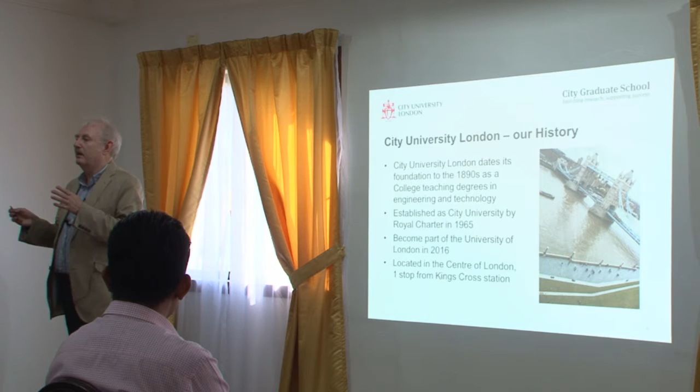If you think about developments in the 20th century, so many were driven by looking at new physics and then taking that forward into creating solutions which have profoundly influenced the way of life we have now. It's almost impossible to envisage the world we live in without it having been shaped by fundamental discoveries in physics, particularly in the 20th century, but some going back to the 19th.

With that, of course, come some great entrepreneurial opportunities. We've seen, particularly in the development of IT, people who have made vast sums of money exploiting those opportunities, and we're very familiar with some of the names of people who have done that.

But if you look back at some of the great scientists of the late 19th and early 20th century, someone like Lord Kelvin, so familiar to us from the Kelvin scale, was really a very entrepreneurial physicist. He worked in the field of communications, on the early transatlantic cables, solving many of the problems that led to the first transmission of the telegraph and then the telephone across the Atlantic using effective cables. In doing so, by being involved from the start, he made himself a lot of money. So being an entrepreneur is not new — it actually goes back quite some time.

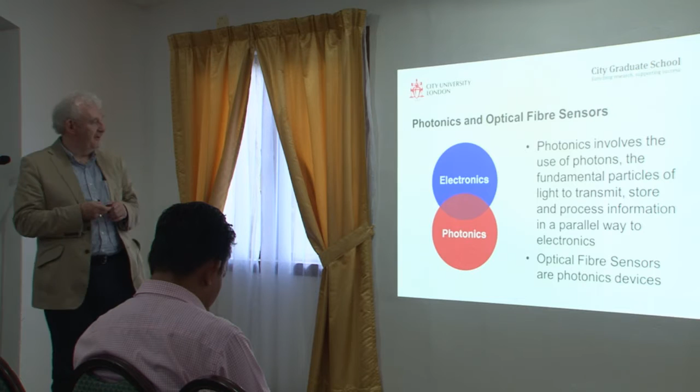So if you think about it, the electron is a fundamental unit of charge, of course. It's got a small mass, and it travels along a cable in the way in which we're familiar with. You can look at the parallels between the electron and the photon: it's a fundamental unit of light, but there's no mass, and of course it travels along insulators in the same way that electrons travel along conductors.

And of course we're transmitting information at the speed of light in that medium, and the medium is typically glass with a refractive index of around 1.5. So you can see you get a reduction in the speed of light in vacuum by that factor. But it does mean that you can transmit information very fast, and of course we're familiar with that with optical fibers used in communication systems, because that's the way in which we get the quality of communication that we have at the moment.

So optical fiber is very important. I'll be dealing with sensors using conventional optical fiber. In many ways, the same type of optical fiber is used in communication systems, or fiber that's relatively similar. I'll show some of the differences perhaps as I go along.

And Gilberto will mention a different type of fiber in the presentation that he gives. In that way, you can see the parallels between the use of communications type fiber for optical fiber sensors and some of the new microfibers and the potential that they have. So what it shows, I think, is that optical fibers in sensing — it's not just a straightforward single sphere of work, but in fact one where there is considerable breadth.

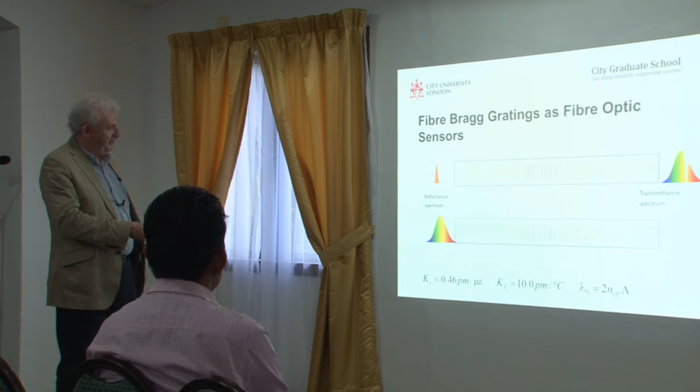If you then take that same grating in the fiber and change its characteristic - for example, you stretch it as a result of temperature, pressure, strain, or humidity - that stretching changes the wavelength that you get coming back. In that way you can pick up a slightly different signal, and relate that perturbation, that change, to the change in color.

Just going to grab one of these things here, which will give me some... it does a trick. There is a straw. Great, and then perfect. Good, that helps.

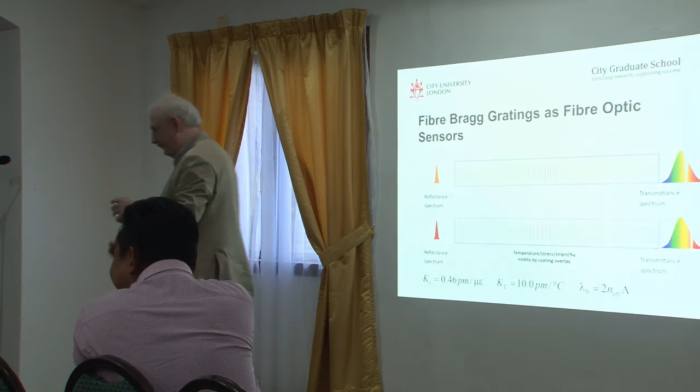So we have the characteristics of the optical fiber grating.

We've done a number of different things along the way, and I won't dwell on all of them as there simply isn't time. But one thing particularly relevant to the issue of coastal erosion and protection of landscapes is some of the work we've done on safety monitoring in relation to steel and composite bridges and concrete foundations, because we've put optical fiber sensors into some of these different types of structures, and I think there are many parallels to the solution of the type of problems we have here. This is a rather nice bridge.

It's a 350-meter concrete bridge in Norway, and we put some optical fiber sensors in the middle of this to monitor the strains due to the traffic.

So the sensors were installed within the bridge after it was built, and we were able to monitor quite nicely. This is a much smaller bridge, a 10-meter bridge. It's not designed for traffic at all, but in fact for people. Although on the opening it was, you can see that it had a rather heavy piece of traffic through this.

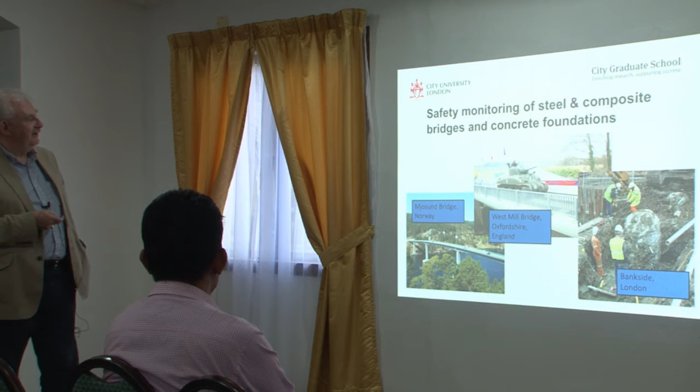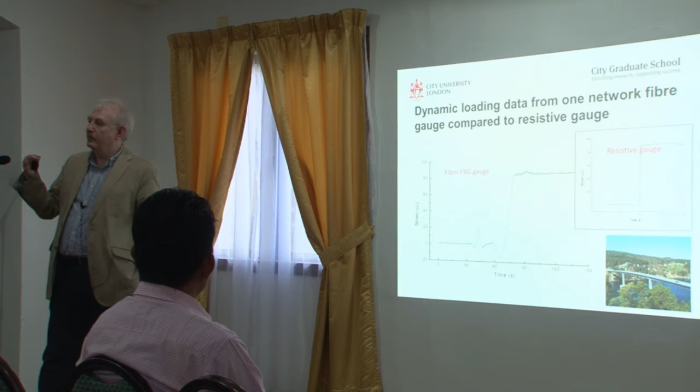So you can get results which parallel very well the results you get from the resistive gauge. You can get more information, and of course this is just from one gauge, and you can put many of these gauges, connect them in a network across a bridge of several hundred meters. So I think this is one parallel with the situation we have here, where you want to make measurements over, I'm sure, many hundreds of meters. So optical fiber sensors joined together in a network work very well under those circumstances.

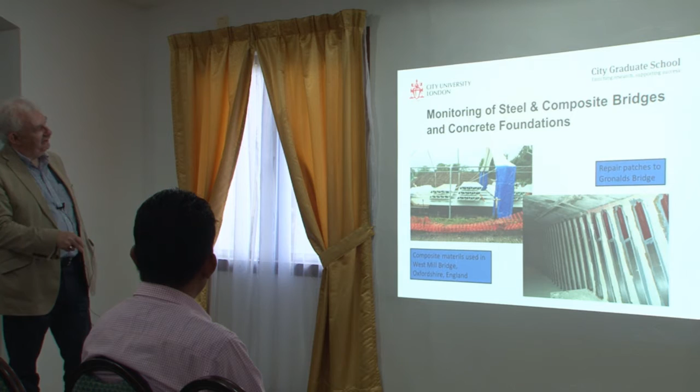This is the inside of a bridge. It's a box section, well, rather similar to a room like this. And if you imagine if there were cracks in this wall, then basically this is the problem that you have with this concrete platform bridge, that it has cracks because after 30 or 40 years, then you begin to get problems with the degradation of the bridge due to cracking.

So what you can do is you can put patches on it, and these patches are made from carbon fiber, and in some of these you can put optical fibers, and those optical fibers will help you to measure the strains on the repaired bridge, and help you to avoid excessively straining the bridge, so that you don't end up with more problems from cracking that's continuing.

This is another bridge we looked at, one which we had access to. It's a 1950s railway bridge in Sweden, a concrete bridge that was taken out of service. You can see that this bridge has been loaded, and you can see the major cracks that have resulted from the loading.

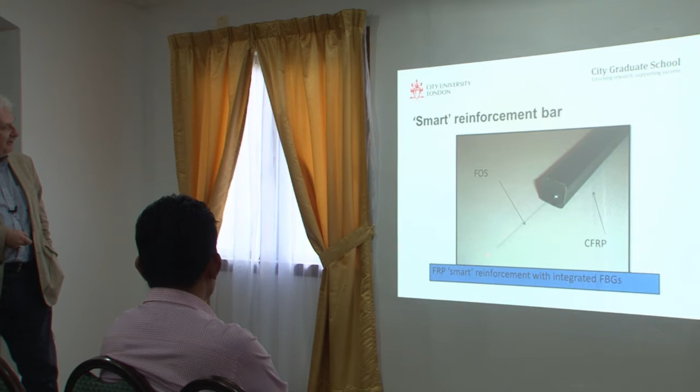Before this bridge was loaded, we put some optical fiber sensors into it to monitor what was happening. This is the technique we used: we took carbon fiber reinforcement bars, put an optical fiber inside those bars, and then inserted them within the bridge. This is the carbon fiber reinforcement - you cut a groove in it, glue the optical fiber sensor in, drill a hole in the concrete, and then insert the tube into the structure.

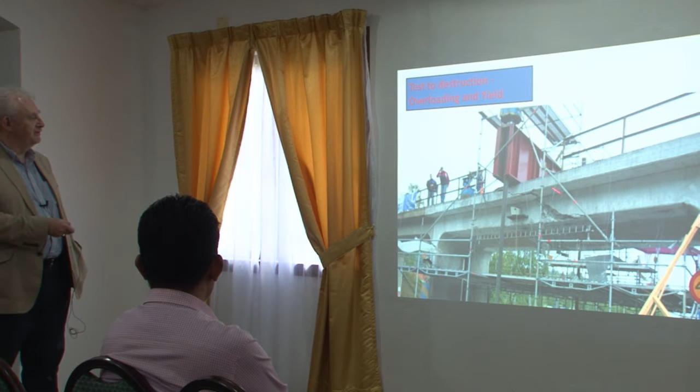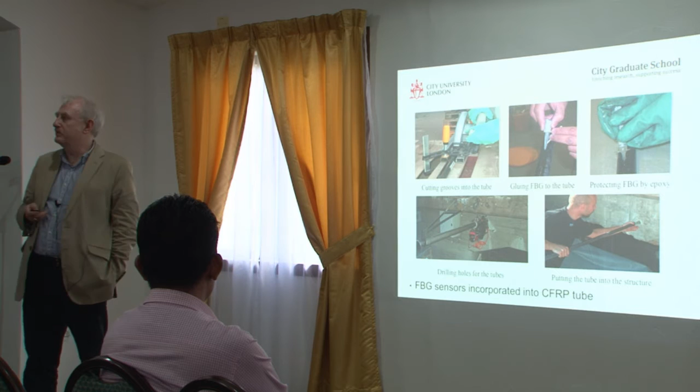And then the optical fiber within that reinforcement bar is used to provide strengthening. In our case, we were actually loading this to destruction because it was an unusual situation. The load was 10 meganewtons, and we were very easily able to measure that load and the strains that were created. You can use these techniques in the repair of bridges, and that way maintain them over many years.

One thing you might think about with optical fiber sensors is that optical fibers are very delicate. If you're doing work in a laboratory with optical fiber, you're dealing with something delicate, something where you want to keep it in a nice, clean, dust-free environment. But in fact, one of the things you can do with optical fiber sensors is install them in concrete.

This is some work we did with a commercial firm that makes precast concrete pieces. Think about concrete lampposts, concrete railway sleepers - there are a lot of standard precast systems available where you make certain pieces by the hundred or the thousand. There are commercial companies like Creagh Concrete which do this.

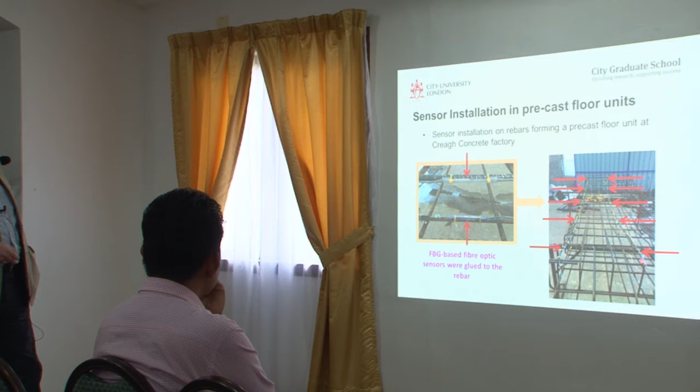For some of these, you want to measure what's actually happening within the concrete. This is a floor panel, fairly large. What we've done is build a cage of reinforcements using steel, and then put an optical fiber with optical fiber sensors using Bragg gratings to measure the strains. You can see the yellow optical fiber running all along the reinforcements, and then this cage is filled with concrete.

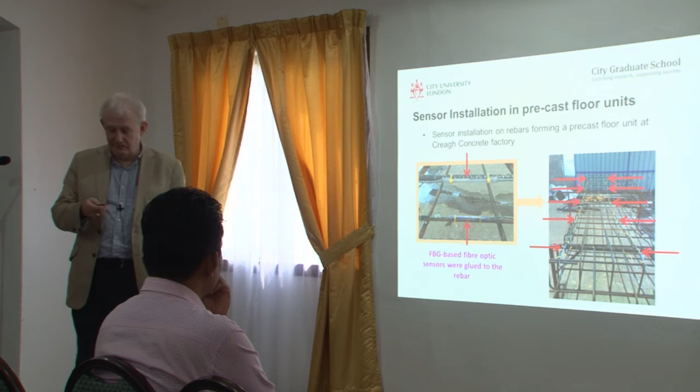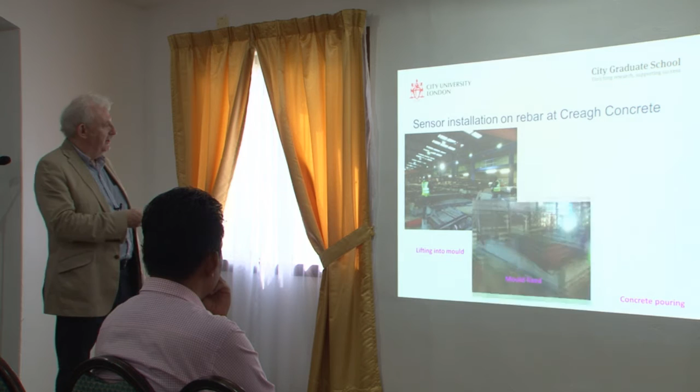This is the factory. You can see the workers involved here, and this is the production line. This is one of these large devices being built, and then we're pouring concrete onto this cage - nasty wet concrete being poured onto the cage to make the panel.

If you look closely, you can see the panel, and coming out of it is the optical fiber itself - the yellow is the plastic coating on the optical fiber. We have a couple of connections here just being held up while the concrete is drying. This is the sensor connection, inside the concrete here, and we're just protecting it with a simple plastic bag.

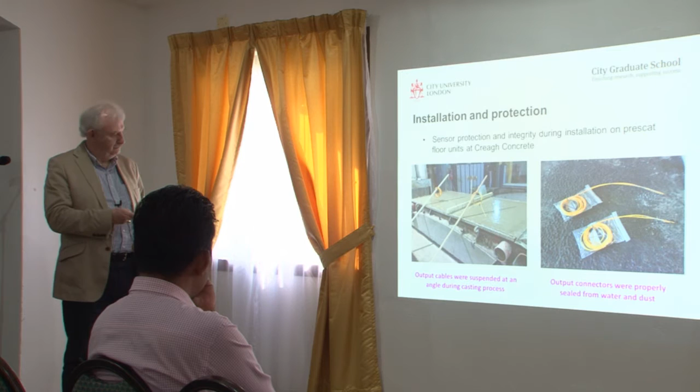So you can use these optical fiber sensors in concrete to make measurements. This is one of the important things that links into our problem of landslides and erosion - I'm sure there are going to be situations where we want to do the same.

Another problem with concrete is the energy it uses. If you manufacture concrete, as major countries across the world do, there's a vast amount of energy used in its manufacture - it is very, very energy consuming. One way of trying to reduce that is to cure the concrete under situations where you use different types of setting rather than just conventional heat. We're working with colleagues at University College London and a couple of commercial companies to microwave concrete. Like using microwaves to heat food, you can use microwaves to heat concrete and make it set faster.

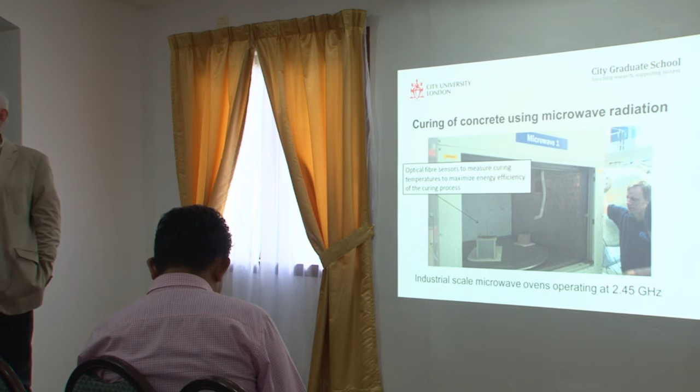The main difference is that you need a rather larger oven. This is a commercial microwave oven. You can see from the comparison with the worker here just how big it is, so you can cook a lot of food in that. Our colleagues in the company have demonstrated that you can cook something like a large turkey that won't fit into a conventional microwave oven - it fits beautifully into this, and I'm told it's very good.

So we're cooking concrete, and for the purposes of this test, we're using standard cubes of concrete. An oven like this, and indeed a bigger oven, is really planned for the curing of devices such as concrete sleepers for railway systems. They're that sort of size, and they fit very well into an oven of that nature.

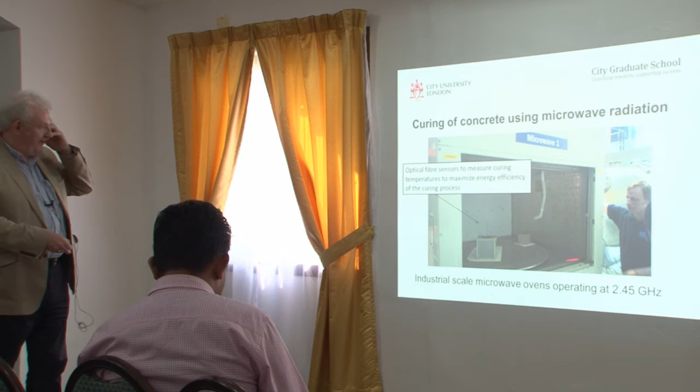So what are we doing? This is our colleague who runs industrial microwave systems, Bob McKinnon, and we're looking at monitoring of the signals from the fiber Bragg grating that we put into this concrete while it's being cured. That's the standard block, and this is our optical fiber sensor. It's a little hard to see, but there's an optical fiber sensor just coming out here.

The approach is this one here. In this case we've got simply 5 fiber Bragg grating sensors in the center of this cube, and you can see it coming out here. These are standard blocks that civil engineers use for testing.

This mold here is made out of plastic, because if you think about the fact that within a conventional microwave oven in the kitchen, you don't put metal objects into it. So again with this, you don't use a metal case, but a plastic one - you can use plastic or ceramic. In our case, we use plastic to produce these standard blocks.

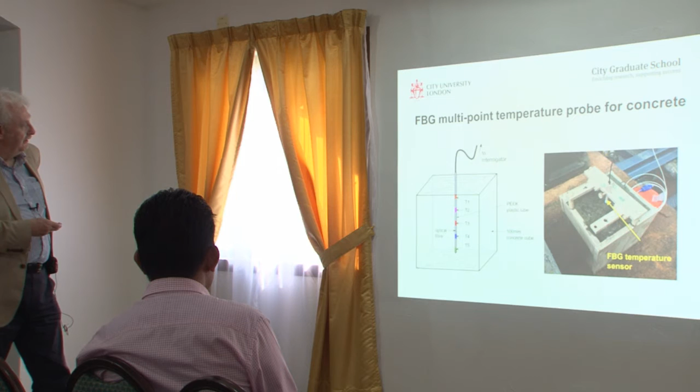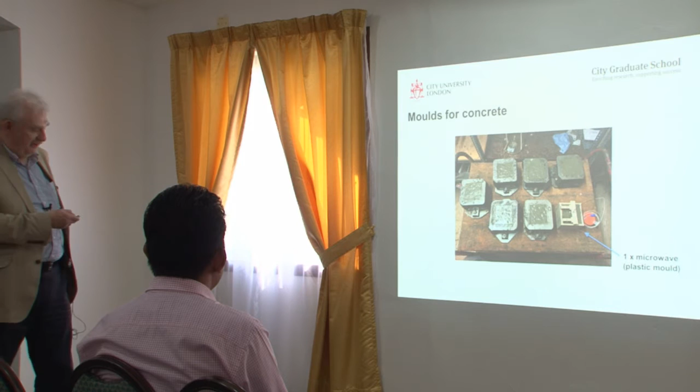And that's our fiber Bragg grating temperature sensor, just here. So these are the sorts of molds that we're comparing with - this is the plastic mold that we use for the microwave.

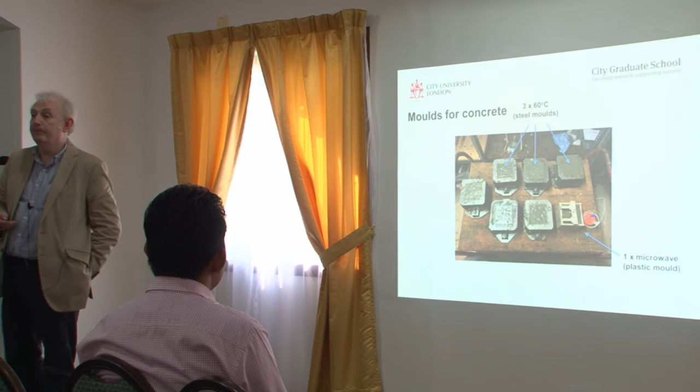These are 3 steel molds, and what we do is we cure them at 60 degrees using steam - this is the conventional industrial way. Then these 3 were cured at room temperature, again in the steel mold. So we were able to compare steam curing with room temperature curing with microwave curing.

The interesting thing about the microwave curing is this: you can monitor the temperature, and these are the outputs from the 5 sensors. You typically want a temperature between about 60 and 70 degrees in the concrete. If you go too high, you'll start to boil the concrete, and you'll get the same problem as if you put an egg in its shell into a microwave oven and heat it - it will explode. You'll get this sort of internal explosion of the concrete, which destroys its quality. So you want to keep it at about 60 to 70 degrees.

The black line is the power profile, showing the way you can put power into the system. Just like your domestic microwave oven, where you can turn it on for a second or 10 seconds and then turn it off, with the microwave power what we end up doing is having a burst of power, then turning it off, then another burst - with the feedback from the control system, you can see that mostly the microwave oven is off. We're maintaining the high temperature by minimizing the amount of energy we're putting into the concrete from the microwave oven, so it's very energy efficient because the oven is off most of the time.

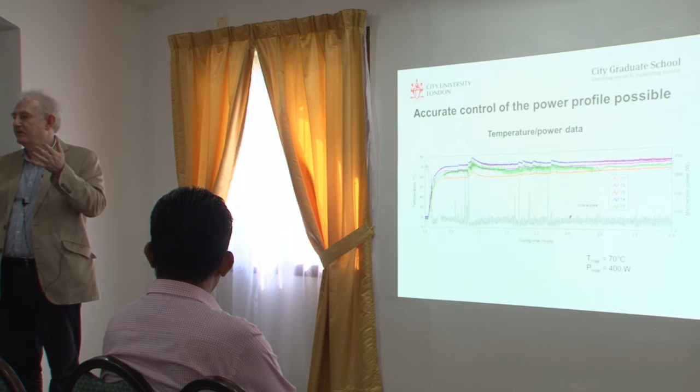If you compare that with the way you might do it with steam curing, you're passing steam continuously over the concrete sample, generating steam at above 70 degrees and passing that over - so you have a lot of energy needed to generate that steam.

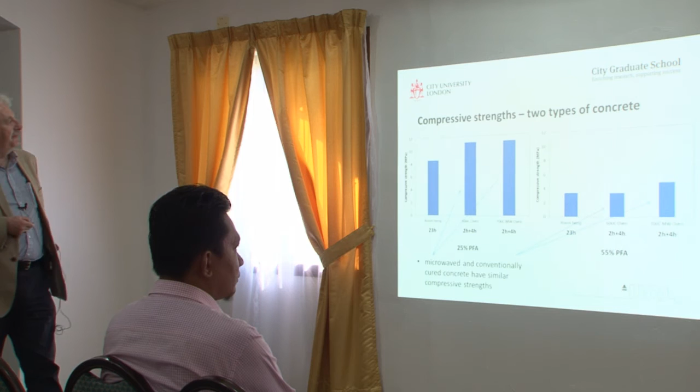And these are some measurements of the compressive strength. We had a meeting just last week of our consortium, and there is some new information that's come through from the tests that are being done. But there are two tricks that we've used here that supplement the use of microwaves to produce very low energy consuming concrete.

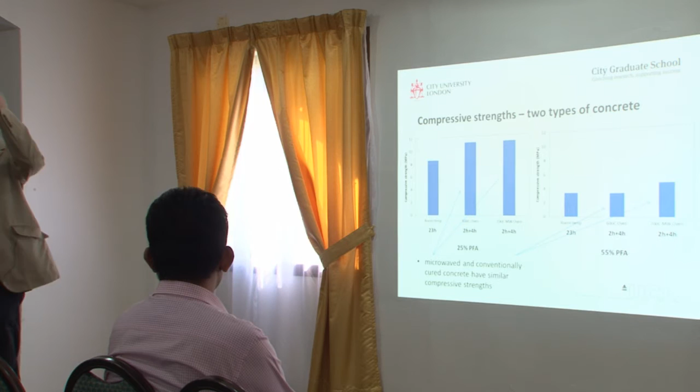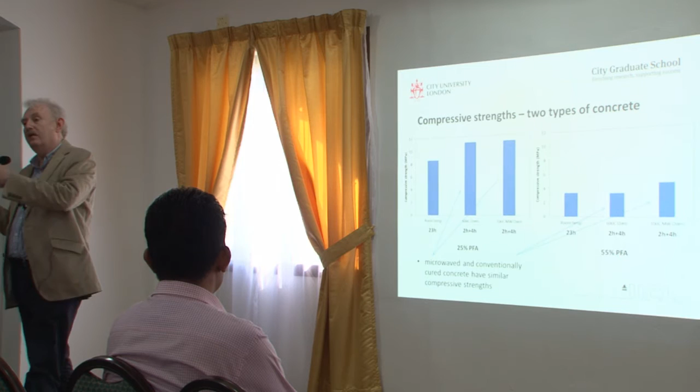This concrete contains 25% pulverized fly ash, and this 55% pulverized fly ash. Fly ash is a waste product from coal-fired power stations. It's a waste product, and there's a real problem getting rid of it. But it's a very good material to put into concrete because it reduces the amount of cement you have to use. So if you've got 55% pulverized fly ash, you only have 45% cement. Cement is expensive when you're building very large buildings, so you're reducing cost. In addition, you're reducing energy. The pulverized fly ash is a waste material, whereas cement is a material you have to manufacture, using energy to manufacture. So this is the one we're particularly focusing on.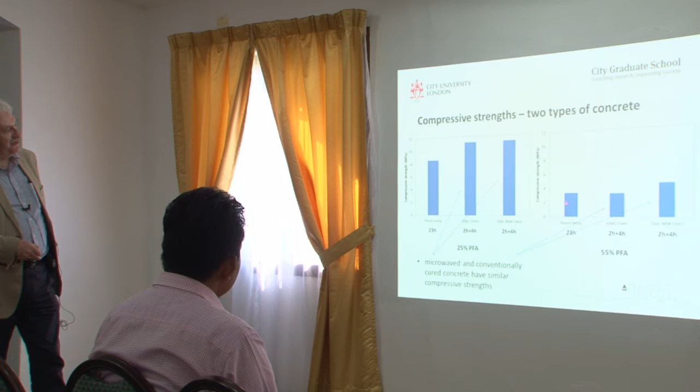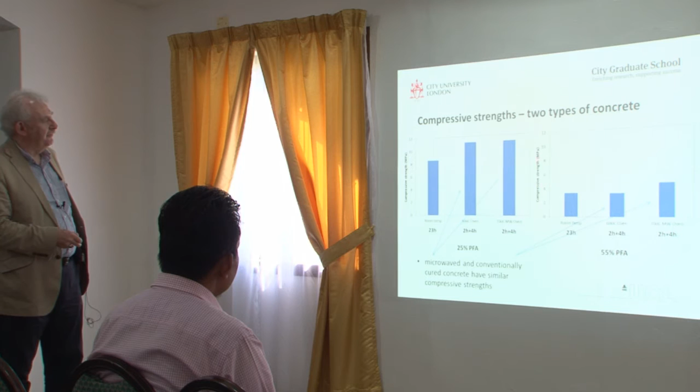And you can see here that looking at the compressive strength with room temperature curing, oven curing, and microwave curing, you're getting very similar levels of strength. And in fact, that's showing a strength of around 4 megapascals.

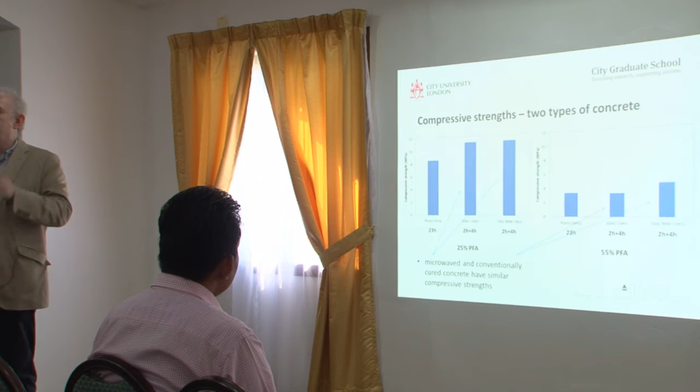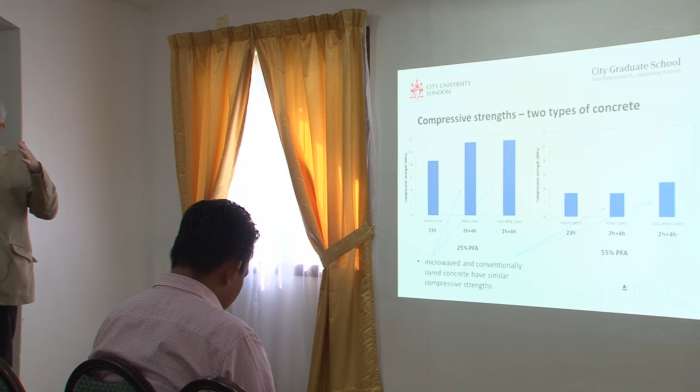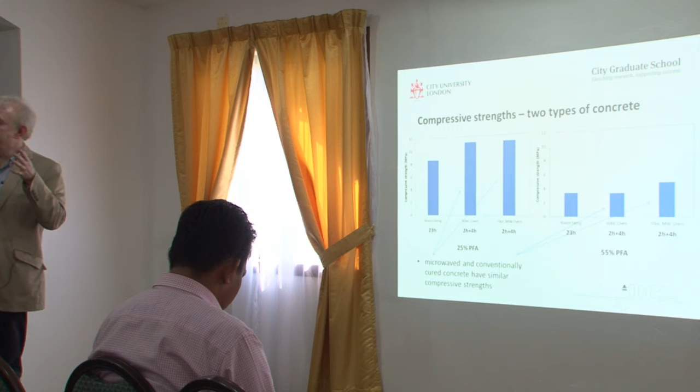At our meeting last week, our colleagues were using a new formulation of cement, and they were able to get strength up to 15 megapascals. That's very, very important because our industrial partners were then able to say the strength of that concrete is the right strength we need for the production of the types of precast elements we produce. So they're able to get concrete of the right strength, which used a lot less material, and also used microwaves to cure it. So the whole energy efficiency of these new samples was very, very much better.

And this is just a picture of the energy efficiency of the samples here, comparing conventional with microwave for the two different types of fly ash. So it's a very efficient way of making concrete.

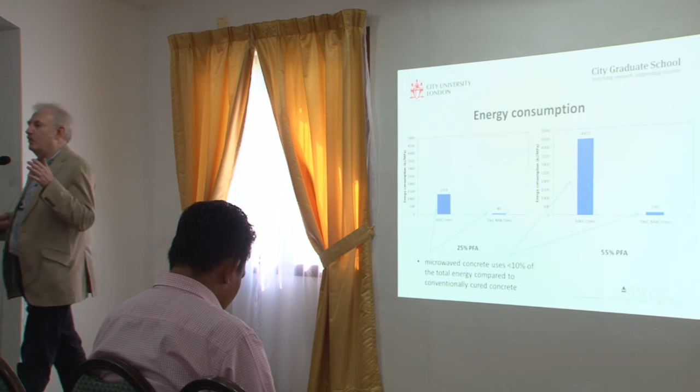So what you have here is high quality using the optical fiber sensors in a way that you can't do with conventional sensors, and at the same time obtaining a very, very low energy profile. And that's the power profile that goes with it. Again, you can see mostly off, with just peaks of energy coming in.

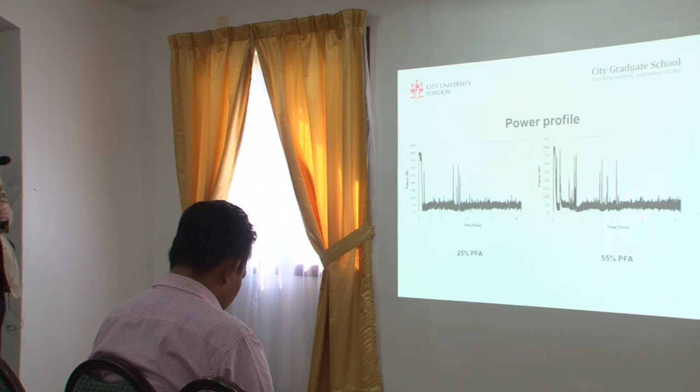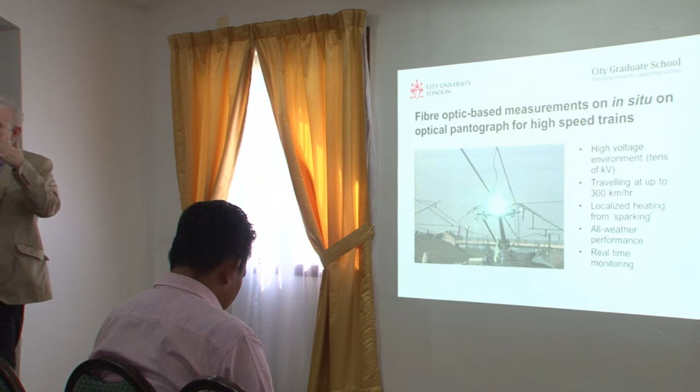Another problem we've been dealing with is the measurement of the conditions of train pantographs. A pantograph is the part of a train that connects to the overhead electrical wire, running at typically 25 kilovolts and high current, 100 amps or something like that. So there's an enormous amount of power coming through this into the train to drive it. One of the problems is maintaining the contact, and what happens when you have a difficulty with that. Now I've got a little video here, and I'm wondering if I can make it work.

It might take me to just hit this here. Good. So this is a pantograph on a conventional track line here. Everything's working fine, and this is the way it should be.

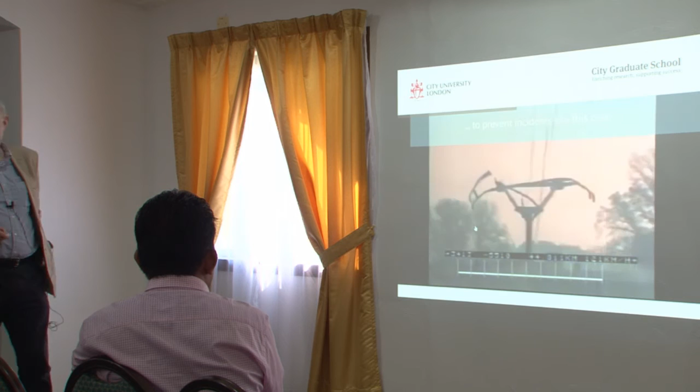So we've put our optical fiber sensors onto this pantograph. This is where things start to go wrong. You can see some of the difficulties that arise - if you break up the pantograph, you can have problems with it breaking, the connection failing, and it can sometimes take the line out. So what we're looking at is putting optical fiber sensors onto the pantograph. We're working with this group of companies here - these are the main manufacturers, and Network Rail are the people who use these.

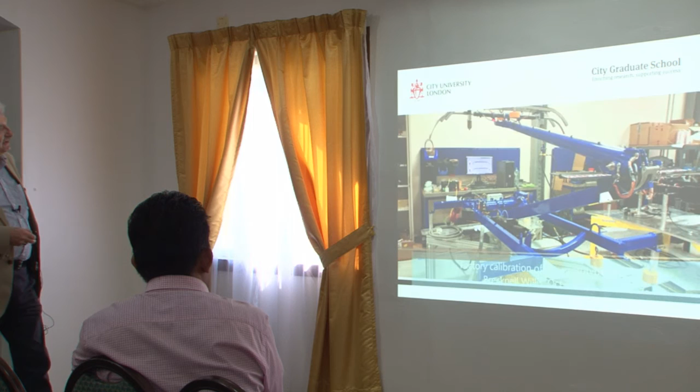So we've been using this in a closed loop system for improved performance monitoring, working with Brecknell Willis. I think you can just see my colleague Professor Tom Sun here with Lee Brown, who's the representative of Brecknell Willis, at that exhibition. You can see this is the pantograph, and the sensors are up here, and this is just the optical fiber line running down at the moment. We'll be able to build that inside the pantograph itself. But it gives you an illustration of the problem and where the solution arises.

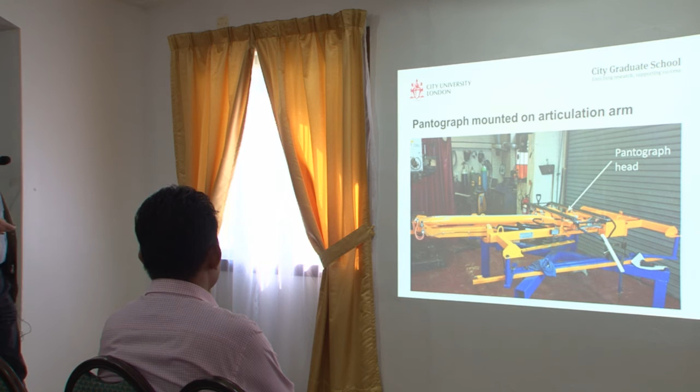So this is the pantograph on the articulated arm that you saw. Really what we've been doing is experimenting with a number of different configurations of optical fiber Bragg grating sensors to measure the strain in this environment.

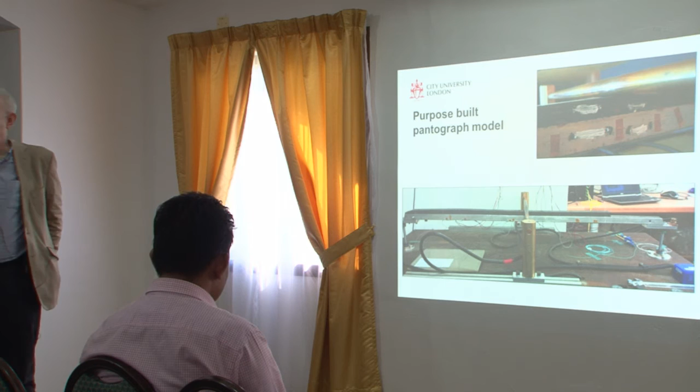We have a test rig here in the laboratory. For safety, it's a low voltage one, running at about 6 volts rather than 25 kV, but at 100 amps. So we're getting the same heating, but at a much lower rate, and we're able to show some of the problems and some of the solutions.

You can see here some of the sensors that we have built into the system, and then we're calibrating it in the laboratory with the use of different masses to provide the weight, so we can see the way in which the force is applied across the pantograph itself.

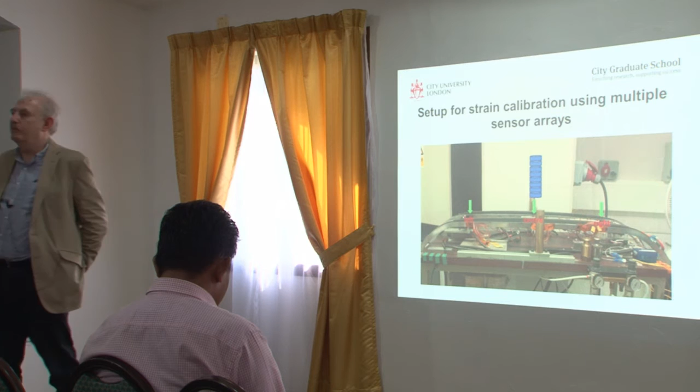The force is typically about 19 newtons, the ideal force. We want to measure that because if it goes much higher, you've got a potential problem, and if it's much lower, you have a problem of it not making the connection. We can measure that and the position, and feed that back to the train operator.

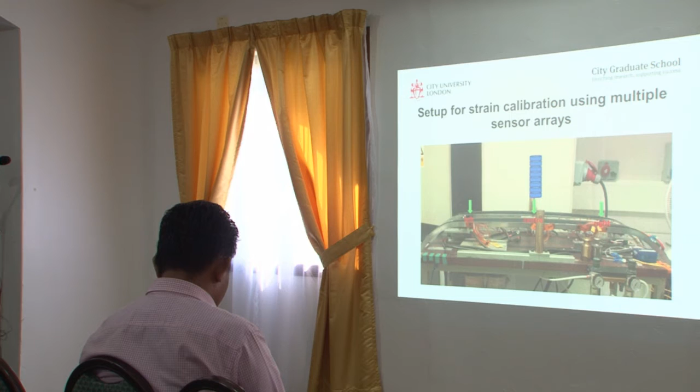Another area we've been working on is fiber Bragg grating-based humidity sensors. We make these by taking an optical fiber with a Bragg grating and applying a polyimide coating. That coating swells, and because it's in close contact with the fiber, the swelling causes the fiber Bragg grating to expand, which we measure.

So we have humidity giving a swelling of the polymer, which provides a strain on the grating, which then gives us a shift in the resonance band of the grating.

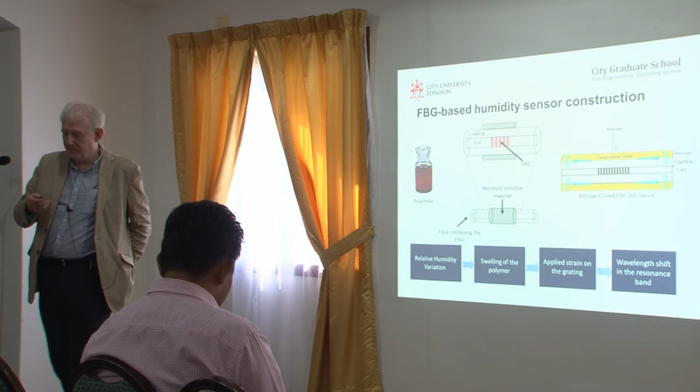We've been building sensors in different configurations to do this. If you look at the reflectance as a function of humidity, you get a peak shift, and you can measure that and calibrate it.

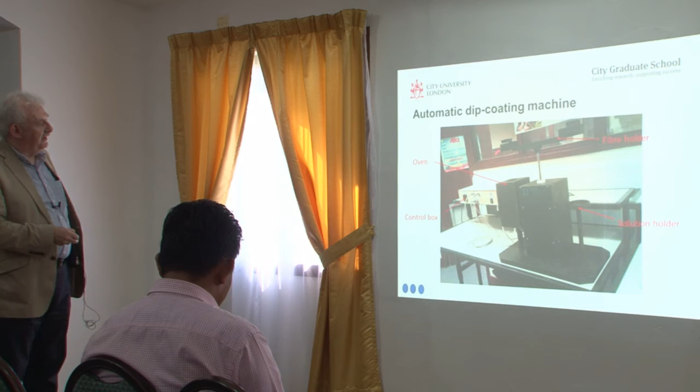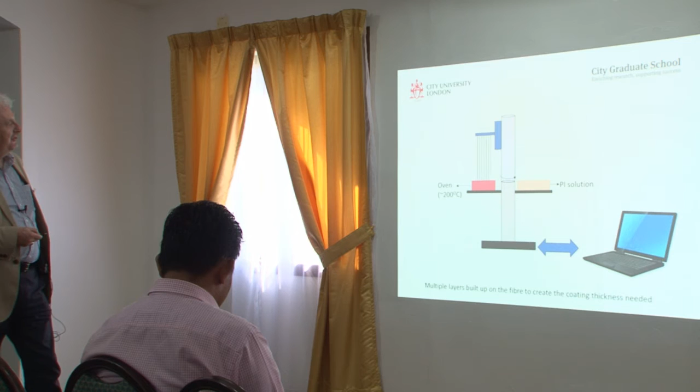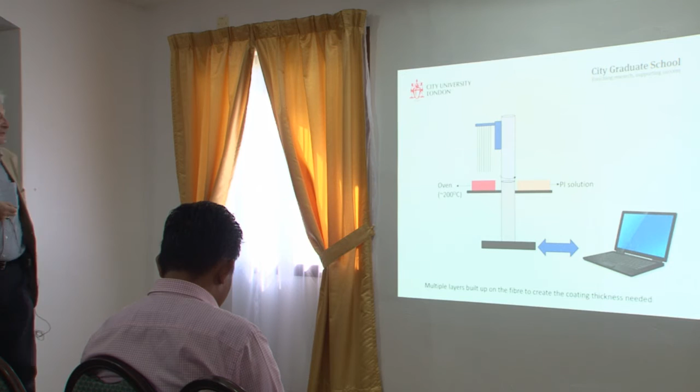We produce these sensors ourselves, manufacturing the gratings and then coating them using this device. The technique is as follows: you dip the fibers into the solution, swing it over and dip it into an oven to cure at about 200 degrees, then repeat this for up to 40 to 50 coatings. You gradually build up the coating, and you can change the sensitivity and response time depending on the coating.

So what have we been doing with these sensors? We've configured them in different ways for different applications. What you need as well is a temperature sensor, because your humidity sensor will also measure temperature, and you want a separate temperature sensor so you can unscramble the effect of temperature and humidity.

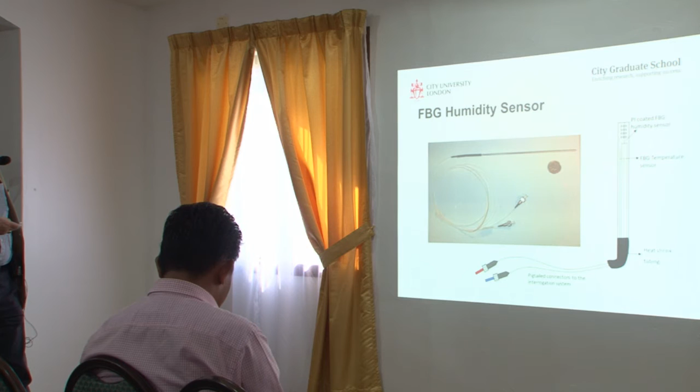We have built some sensors like this - a stainless steel tube with just some grooves to allow the humidity in, and the optical fiber is inside this. This is a euro 1 cent coin, so it's a small coin, and you can see something of the scale.

We've looked at, with some colleagues in Germany, some of the problems of measuring in sewers. I mentioned sewers were a problem because of gas buildup, and we've got sensors to measure the humidity in sewers, and also to measure leakage, because leakage of sewers is a problem.

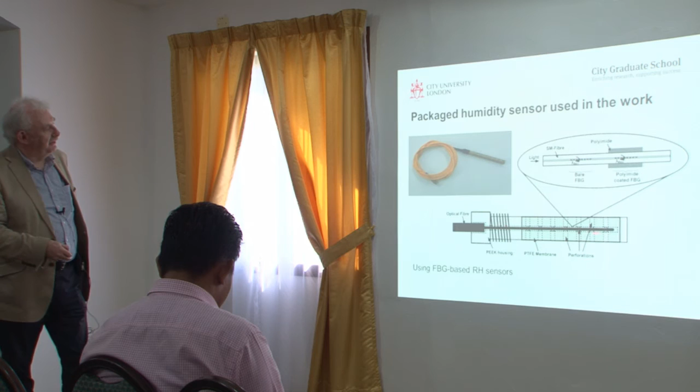We have configured a humidity sensor like this with our German colleagues. We use a fairly hard plastic called PEEK to configure the sensor with the outer coating, and underneath it we use a small Teflon membrane, and then underneath that is the optical fiber itself. That's the package we use, and we get a nice response between wavelength and humidity and good calibration.

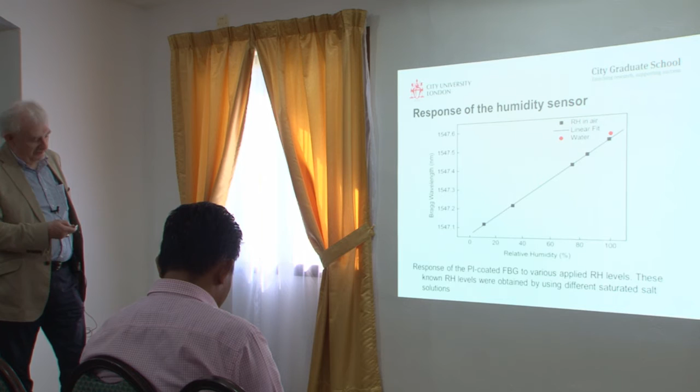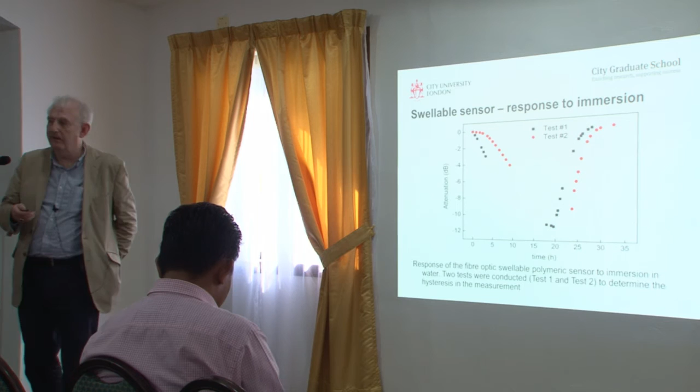And we can use that to measure the leakage.

But perhaps the most interesting work is some work we've done over the summer last year, and subsequently with a utility company in Australia, in Sydney, to measure humidity within a sewer. The problem they have in this sewer is a large buildup of hydrogen sulfide, which is a rather nasty gas, present in conditions of high humidity.

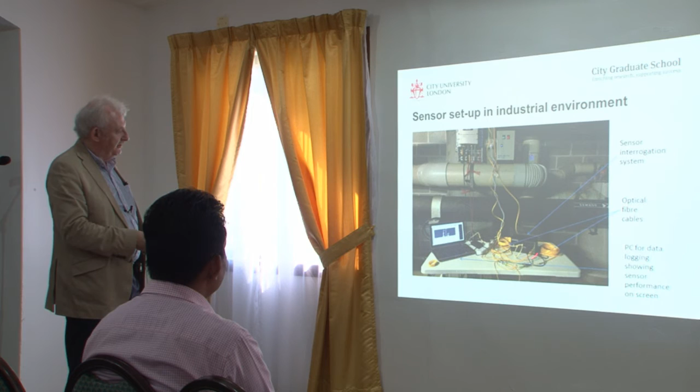So this is it in the sewer. We have two PEEK-type sensors, two printed sensors, and in the middle a conventional humidity sensor, so we're able to compare the performance. This is the setup: our PC, our interrogation system, and lots of fiber to connect it to monitor.

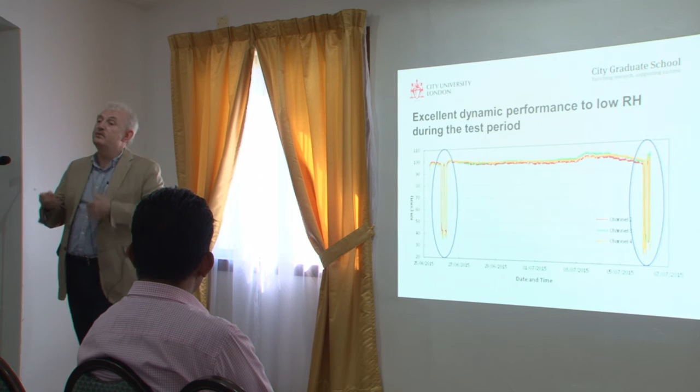The results of some work we did over the summer, over a period of about 10 days, you can see we have a very high humidity, about 95 to 100%, in an environment with a very high level of hydrogen sulfide as well. To show we had the dynamic range we expected, we dropped the humidity twice at the start and twice at the end, to prove the sensor was still able to respond both at the start and end of the test.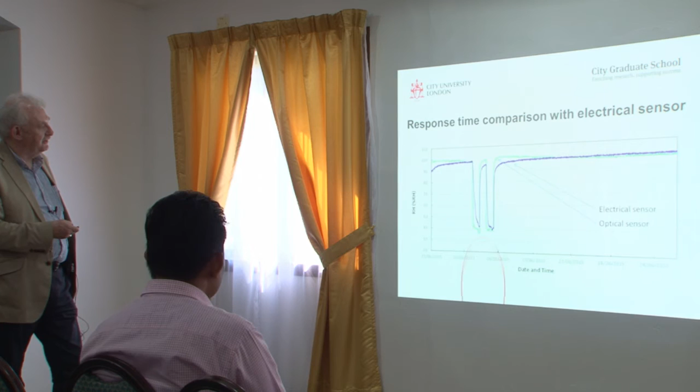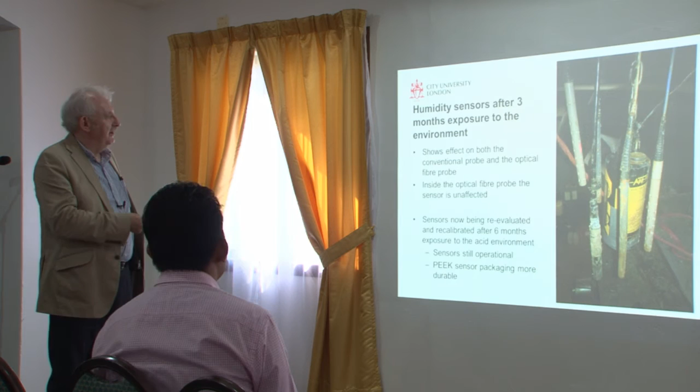So we were in Australia fairly recently, and we brought the sensors back with us, and we've been doing a recalibration of these sensors. They've now been in the sewer for about 6 months, and we're recalibrating and testing them. They all work, which is good, and we're just checking that the calibration is what it should be.

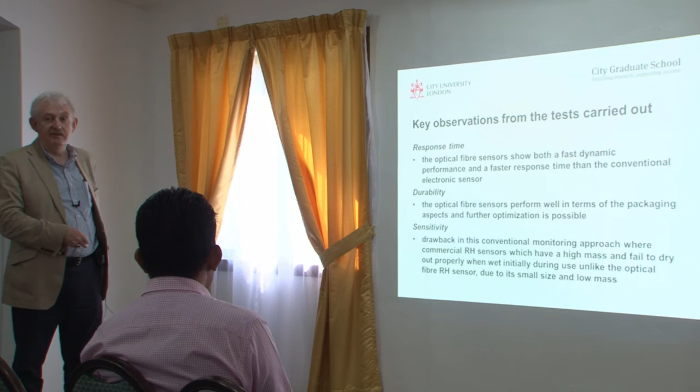But I think the key messages are that we have optical fiber sensors with a faster response time and a better dynamic range than the electrical sensors, that the optical sensors are more durable than the conventional sensors, and that we have a level of sensitivity that's as good. So: response time better, durability better, sensitivity as good. We have a very satisfactory solution to this particular problem, and we're just writing up some work on the evaluation of the sensors after 6 months.

We've used these sensors to measure the problems of environmental degradation of limestone. The problem with limestone is that water gets into it, carrying chemicals with it. Those chemicals can then react with the limestone, which is just calcium carbonate. If you remember your basic chemistry, calcium carbonate plus acid eats away and gives you carbon dioxide and other salts. So we've been using optical fiber sensors to measure humidity, and in that way warn of the wetting of these limestone blocks.

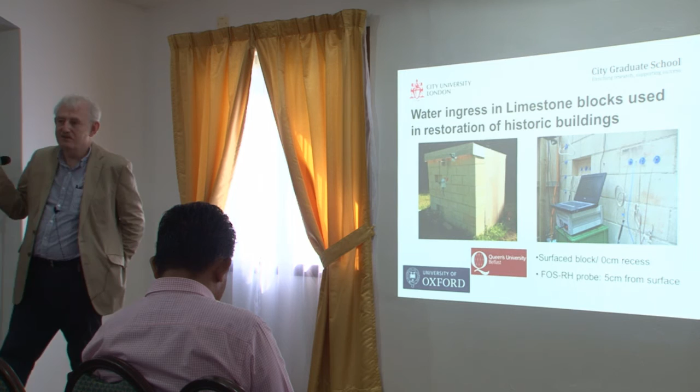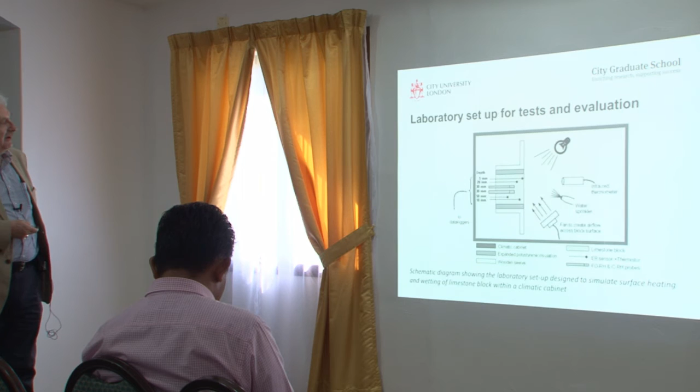Working with colleagues at the University of Oxford, where they have limestone blocks that are 250 years old or more as part of some of the buildings, there is a significant problem. This is a new wall built with limestone blocks, the one where we did our tests, and it's proved that the optical fiber humidity sensor works very well. I won't dwell on some of those results.

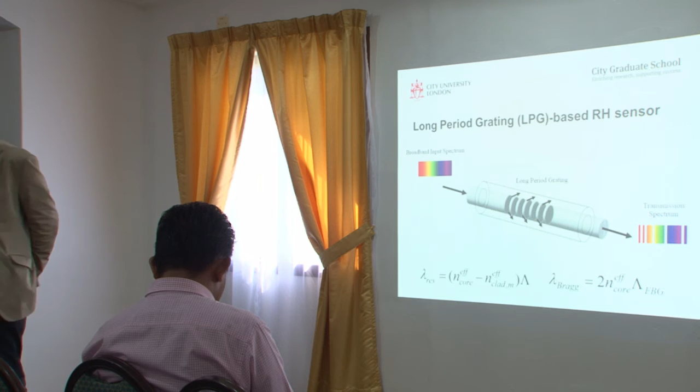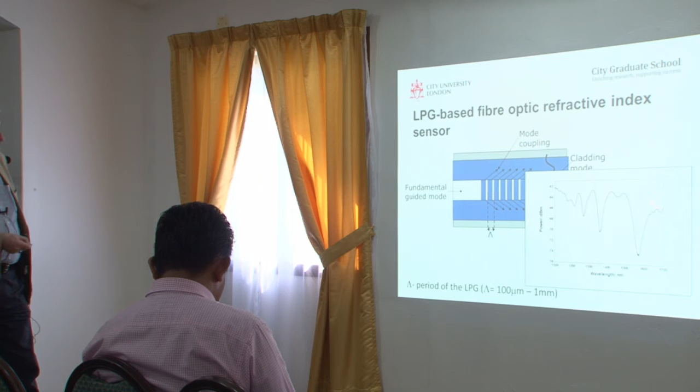We've also used long period gratings rather than fiber Bragg gratings. I'm running out of time, so I'll quickly run through this. These are similar types of gratings and work in a similar way. What you get is a slightly different type of response from the way in which you get the mode coupling in the material. Basically, this is the spectrum. You get a broader spectrum, but one which shifts more significantly. I'll come to the particular result here that's important.

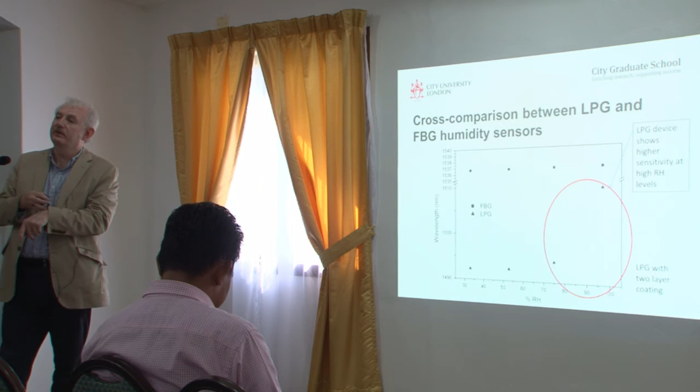Looking at our problems of landslides and erosion, again, just an illustration of the fact that you can use different techniques to monitor different problems. It's just a matter of optimization, and this is a very good illustration of where this technique really optimizes.

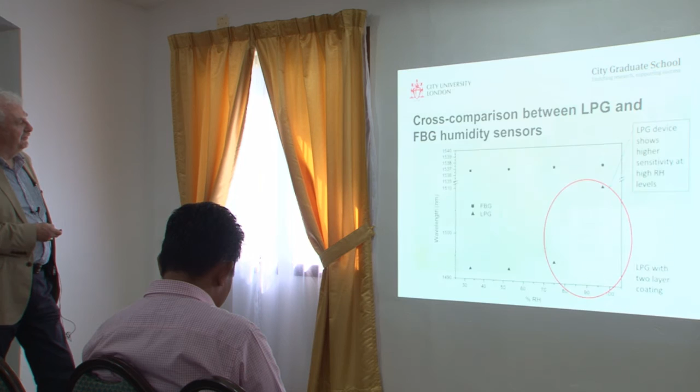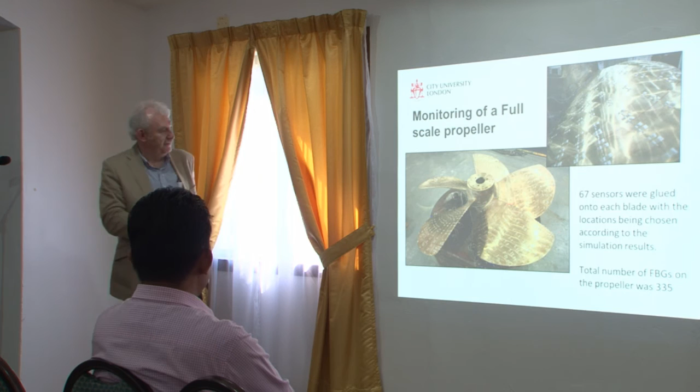I think I've probably run out of time, but let me go quickly through this. This is monitoring of a marine propeller - a full-scale marine propeller, about 2 meters in size across. What we've done is mounted on each blade 67 fiber Bragg gratings, so 67 times 5 means we have about 330 fiber Bragg grating sensors on this marine propeller. The aim is to monitor the acoustic properties of the propeller, because the acoustic properties change very significantly as a result of very small changes in the design.

If you compare with conventional sensors: first, trying to put 335 strain gauges onto this propeller is a very difficult task. Secondly, it will actually change the propeller so much because of the loading of the weight and the effect of these sensors. Thirdly, if you want to isolate them from the effect of the water, you'll be spending an enormous amount of time trying to coat them in some sort of compound to do that. So conventional sensors really just don't work, whereas here we have a perfect illustration of where optical fiber sensors are really beneficial for an issue like that.

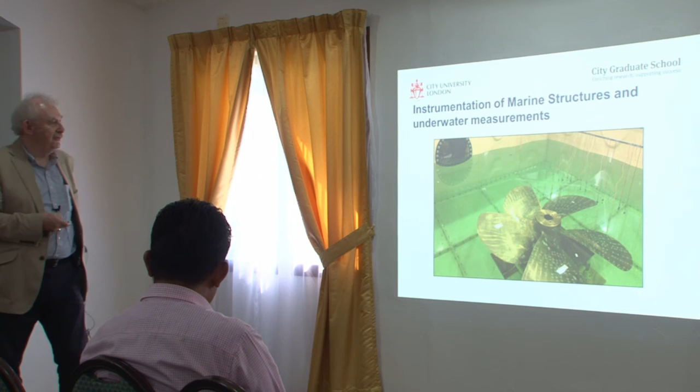We've got some nice results, and I won't dwell on them, but I'll come to the picture. What we have for some of our gratings here is a comparison between a finite element model and the results of the optical fiber sensors. We're just using color coding here, and you can see from the similarity between the color coding with the finite element modeling and the color coding with the experimental work that you get very good agreement. We're currently looking at not just propellers but marine rudders again, to understand their properties.

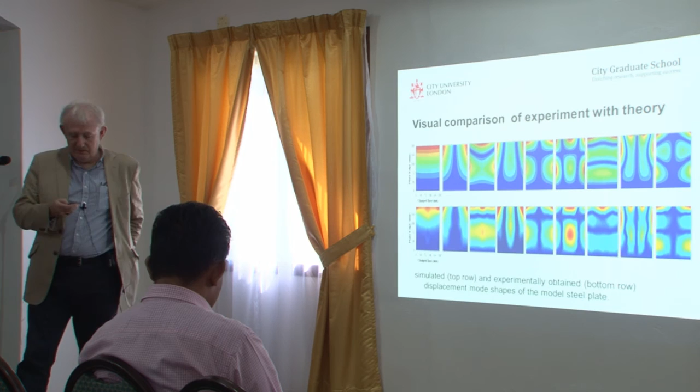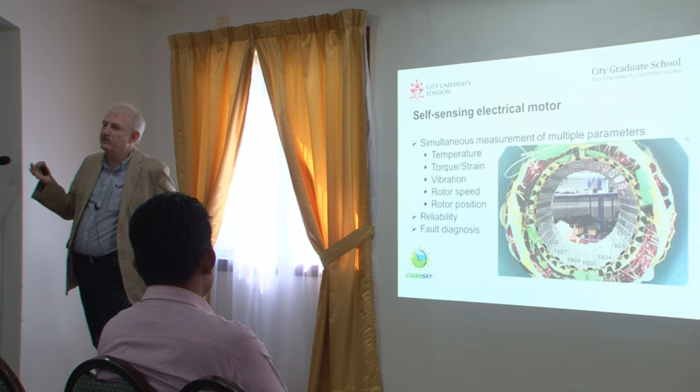So you can do this with different types, really looking at the different acoustic properties. We put optical fiber sensors into electric motors to try and understand their characteristics. As I've run out of time, I'll just flick through that. It's some very interesting, ongoing work, particularly looking at how we can monitor motors better. As electric motors are used more extensively in cars, one question is what's their performance like, and how can we make sure it's as it should be? The way to do that is to monitor inside the motors. Motors are electrically quite noisy and unpleasant, and optical fiber sensors work very well there.

So, acknowledging our funding agencies, and most particularly a group of students and postdocs who've done this work over a number of years and contributed to this, I hope I've convinced you there is real potential for solving the problems we have using optical fiber sensors. We can take some of these techniques and extrapolate them, look at new techniques, and hopefully solve problems. And hopefully in a few decades this building is still standing, the water hasn't come in, and we can say optical fiber sensors have been the reason we've been able to monitor things, so that some of you might come back here in 50 years and see that this building is still there. Thank you very much for your attention, and happy to answer any questions.